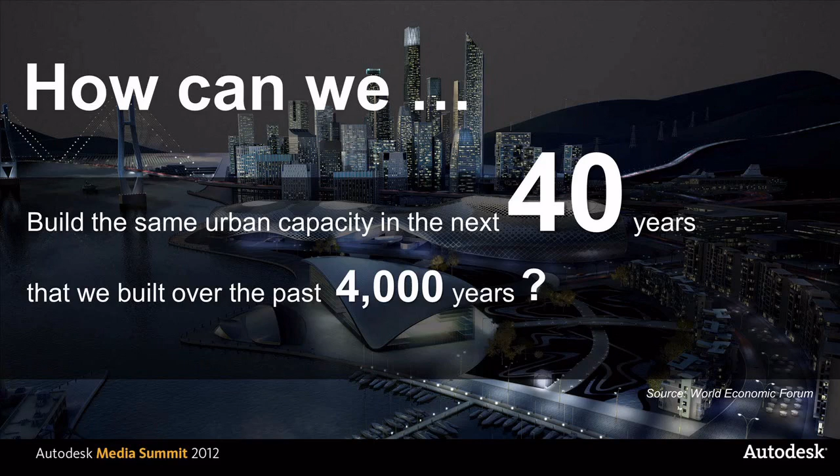Let's start by talking about energy industry challenges. According to the World Economic Forum, the world needs to build as much urban capacity in the next 40 years as has been built out over the past 4,000 years. That urban capacity also represents tremendous growth in energy use and related production, supply, transmission, and distribution, and all in a more sustainable, intelligent way. So the question to explore today is how can we do that, and how can design technology contribute?

Let's take a look at the macro trends driving the energy industry today. First off, there's economic change, represented by more resource demand, more cost volatility, and more environmental issues. Then we have shifting demographics and changes in the workforce and their expectations.

The paradigm is rapidly shifting from a 35-year veteran grabbing a paper network map or plant drawing and heading out to the site in a truck to verify a part or status, to a digital native expecting to access that information in 3D on an iPad or a mobile device.

We also have new assets and new models. For example, plant or network sensors that rely on intelligent connectivity models to deliver value to operations. We also see more multi-firm and multidisciplinary projects requiring model sharing to meet project budgets and timelines. And finally, this all contributes to a data explosion, more intelligent data points, and a proliferation of 3D and imagery data. For that, customers need more data storage, analysis capabilities, and computing power, which echoes the cloud themes that you've heard earlier today.

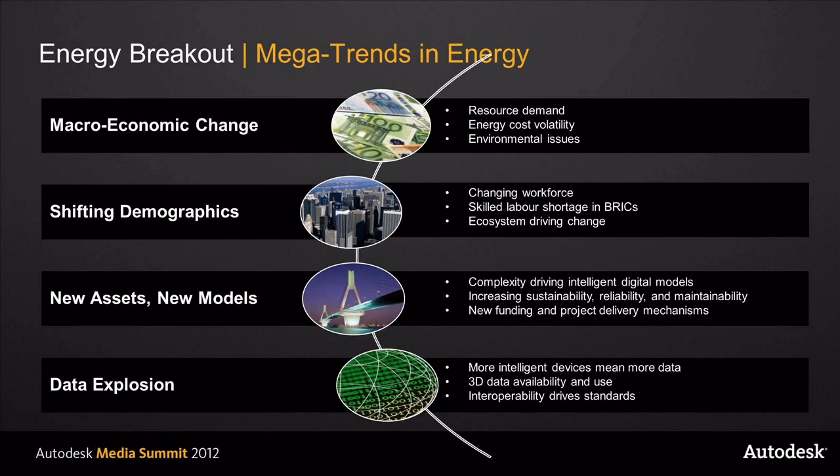Those are trends that cover a very complex set of domains across the industry, from energy supply and production to renewable resource generation to transmission and distribution, and down to end uses like transportation and buildings. Autodesk is unique in having customers and solutions across all of these energy industry domains. Today, we're going to focus on two of these, oil and gas and electric distribution, where combined we have hundreds of thousands of users who are designing tomorrow's energy infrastructure today.

Now I'm going to turn it over to Ben to discuss oil and gas. Thanks, Alan. That was a great introduction and a good overview of the macro trends shaping the energy industry. So Ian and I will be covering the supply side of the energy equation, and we're going to focus on the Plant Design Suite in the context of the oil and gas industry.

So why are we focusing on oil and gas? Well, it represents about 60% of the world's energy supply. And at Autodesk, we believe we can deliver great value to the industry's design and engineering processes.

So first of all, what is oil and gas? To the average end consumer, oil and gas means the gas that runs your car, it's the natural gas that you cook with, and it's the heating oil that warms your home. At Autodesk, we see the entire oil and gas supply chain, and so that includes upstream, midstream, and downstream.

Upstream includes finding the natural resource and getting it out of the ground. Midstream includes the storage and transportation of the natural resource, and downstream includes the refining and processing, as well as bringing the natural resource to market in some consumable form.

So Alan covered some of the large macro trends shaping the industry, and many of these trends are driving real business challenges for our customers. One big challenge is around fast-track projects, which requires multiple project tasks to be done in parallel. Another challenge is around specialized skills and resourcing.

It's difficult to find people who are trained in the technology, and when they are able to find people, they tend to be located in all different parts of the world. So project teams are spread around the globe. And this leads to challenges around maintaining accuracy and efficiency of your projects.

And lastly, businesses often face complex technology that's difficult to install and difficult to maintain, and often yields very low ROIs. So at Autodesk, we're helping many of our oil and gas customers address these challenges.

We're seeing many of our customers use our software throughout the life cycle of their projects, from planning and design to construction and operations of their facilities. They're using our products throughout their multidisciplinary workflows: AutoCAD P&ID for their P&ID work, AutoCAD Plant 3D for their 3D modeling and piping, Revit Structure and AutoCAD Structural Detailing for their structural design, Autodesk Inventor for their equipment design, and finally they're bringing it all together with Navisworks to do their design review and clash detection.

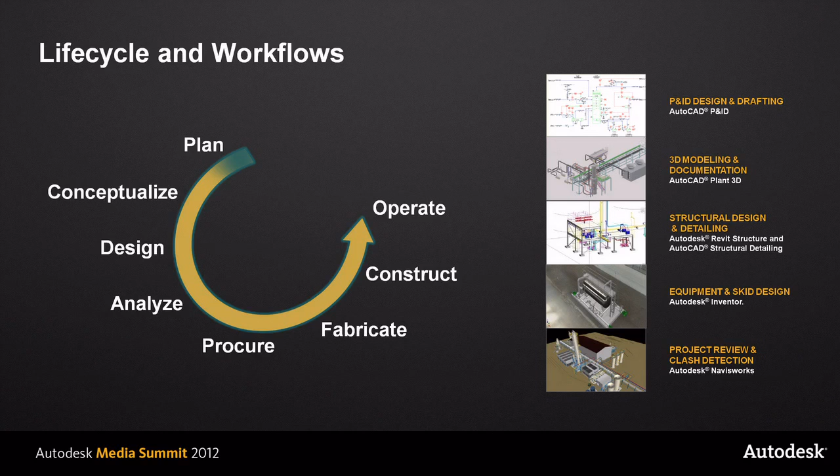With that in mind, we've brought together all these products into a single suite, the Autodesk Plant Design Suite. Today we're announcing the 2013 version of the new Autodesk Plant Design Suite, which comes in 3 editions: Standard, Premium, and Ultimate. It's an intelligent 3D modeling and review solution for plant design from small to large-scale projects such as oil and gas facilities. 2013 offers workflow enhancements that help simplify coordination across project stakeholders. It brings together AutoCAD P&ID, AutoCAD Plant 3D, Inventor, Revit Structure, AutoCAD Structural Detailing, and Navisworks.

And newly available to all Autodesk Suite customers is Autodesk 360. As you probably heard this morning, these are cloud services for computing, storage, and data sharing. At this point, I'm going to hand it over to Ian, and he's going to show you how customers across the oil and gas supply chain are using the suite to help meet the energy supply challenges of today.

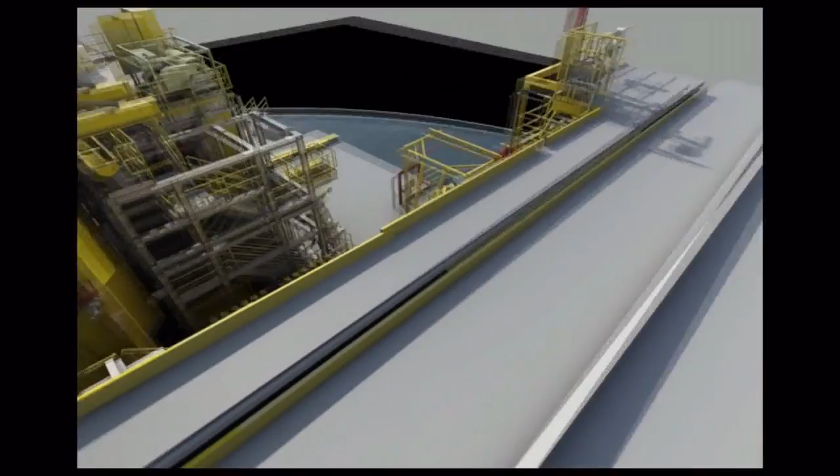Here's a model of the oil drilling rig that RDS just finished working on. Oil drilling rigs are movable and are transported to wherever they're needed, and the owner only sees revenue when the rig is actually drilling. So fast turnaround is imperative on these reactivation projects. As you can see, these rigs are crammed for space.

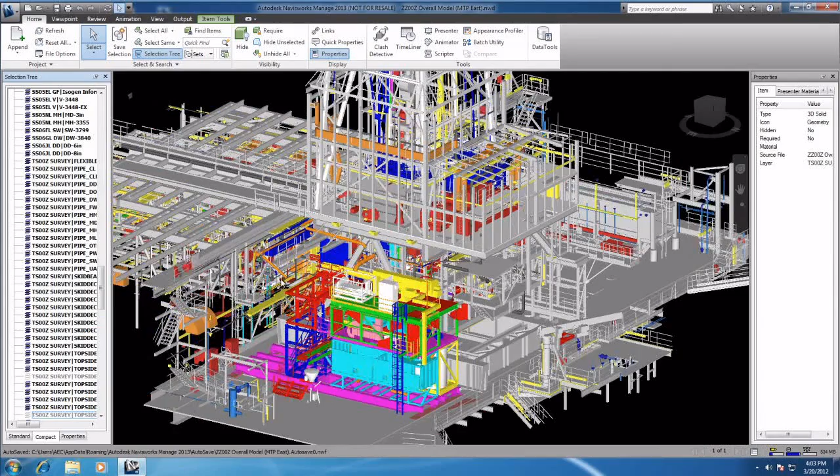Now you can see how complex the rig is as we review the model in Navisworks. The piping and structural complexity is enormous, and space is at a premium. By using the Plant Design Suite, engineers and designers could model the steelwork and the piping, and the project engineers could review progress in 3D.

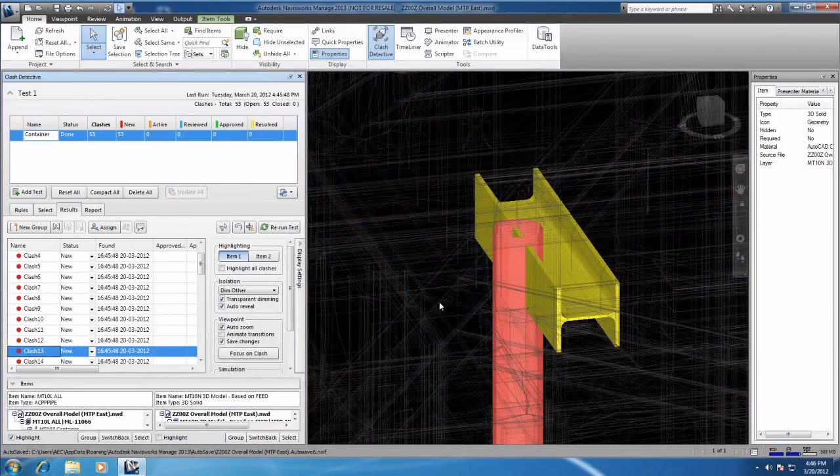One important aspect of the project is clash detection. Piping spools need to be prefabricated and delivered so they fit first time—there's no time for rework. A new feature in Navisworks 2013 is the Clash Detective user interface, which is simpler. In this example, we're checking piping against steel, and here's a clash that needs to be resolved: the piping must avoid the beam. In the Clash Detective, the project engineer assigns this to be resolved. Here's a case which is not a real clash—this is a piping support, so we mark this clash to be ignored.

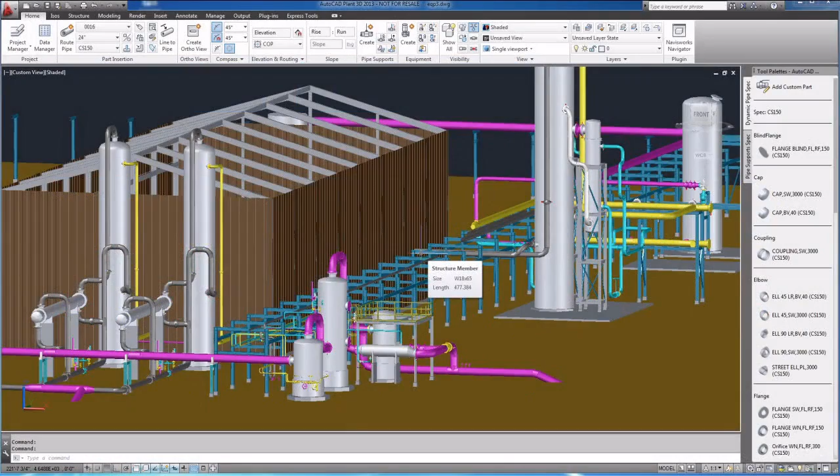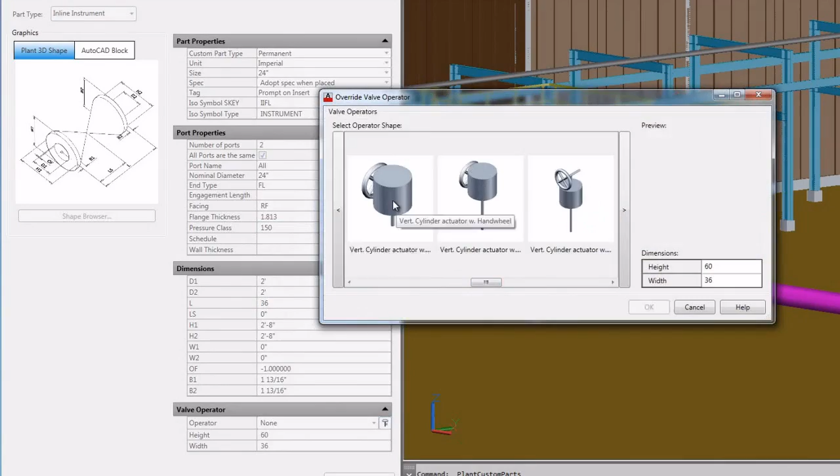In this pumping station example, we'll show you a new feature for AutoCAD Plant 3D 2013: being able to insert custom pipe fittings into a pipe. Normally designers use piping specs to select the correct type of components, but sometimes specialty valves are custom ordered and their dimensions differ from spec valves. Plant 3D 2013 has a new easy-to-use interface which allows the user to input these dimensions, select end fittings, and also the type of operator that will be used for the valve. Then when the valve is placed in the line, the mating flanges are automatically inserted along with the bolts and gaskets needed for the connection. This keeps the materials takeoff current as the model is created.

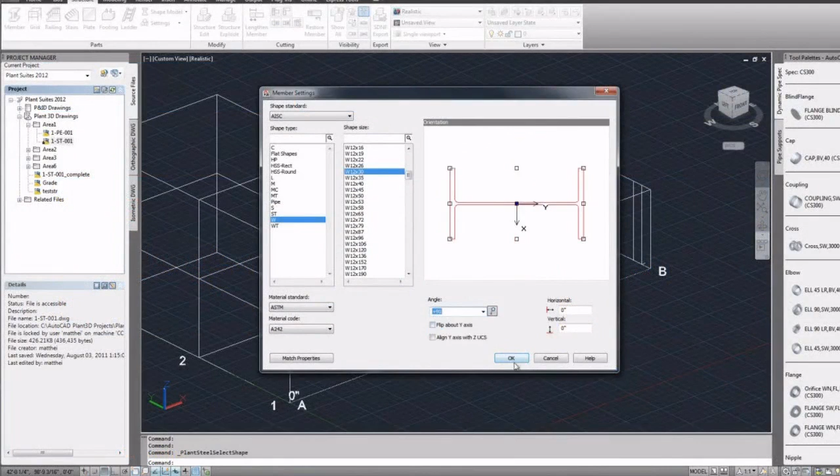Let's take a look at some of the workflows in Plant Design Suite. First, let's take a look at steelwork. AutoCAD Plant 3D fully supports preliminary steel modeling, and here we can see the designer selecting the steel sections he wants and placing the columns on the grid.

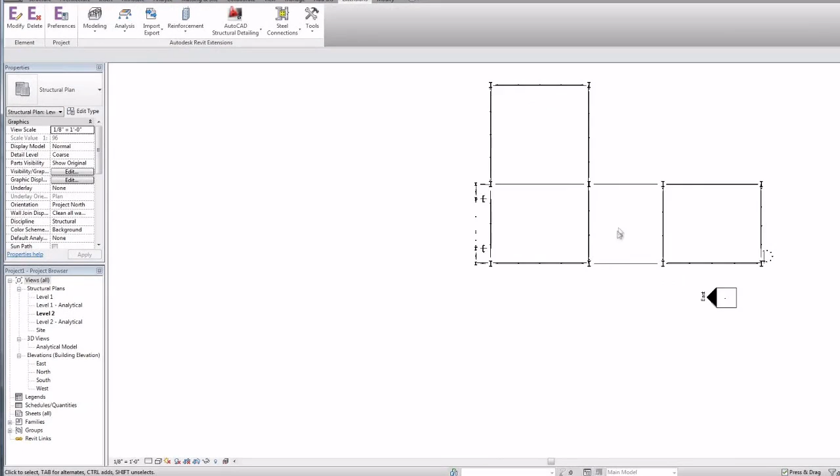Once the preliminary steel layout is done, the steel layout is sent to the structural engineers for the detailed design, in this case Revit Structure. It's used for plant modeling and steel analysis, and the preliminary model is brought directly into Revit. Revit Structure allows structural engineers to work in many different ways, such as standard 3D or an analytical or simpler model.

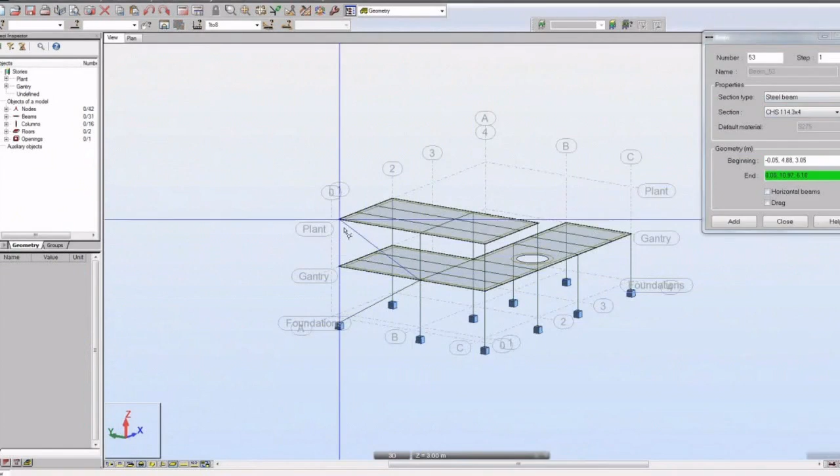Structural analysis is performed using Robot, and as an end result, secondary steel and bracing may be added. Further analysis can be done as necessary. Then going back into Revit Structure in 3D, the bracing can be edited so that it's placed in a more practical arrangement, as we see here.

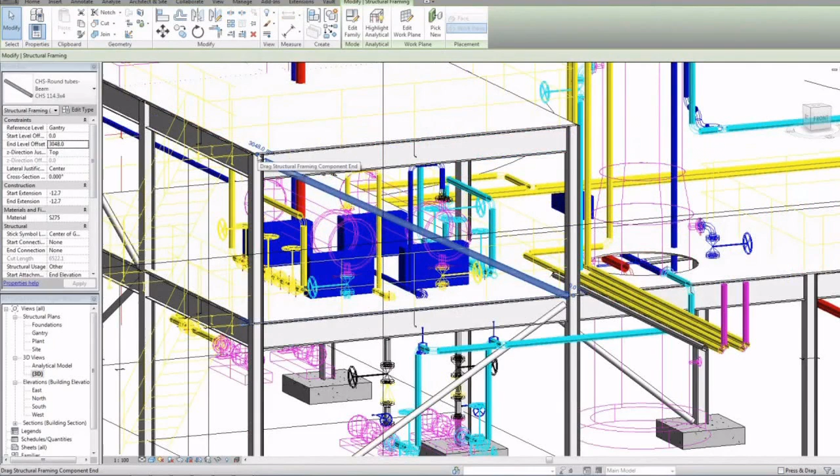Now the structural design is complete and the model is ready for fabrication. For this we use AutoCAD Structural Detailing, also part of the Plant Design Suite, for all of the connections to be designed and documented.

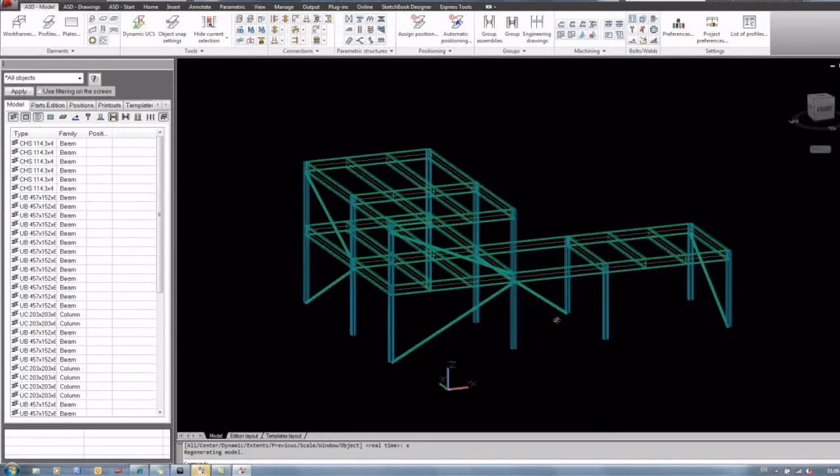Now we are in AutoCAD Structural Detailing. All the beam to column and other connections are designed using simple to use dialog interfaces. Let's look at how a beam to column connection is detailed using these dialogs. The connections, once placed, can be viewed in 3D so that interferences with bolts can be quickly identified and corrected.

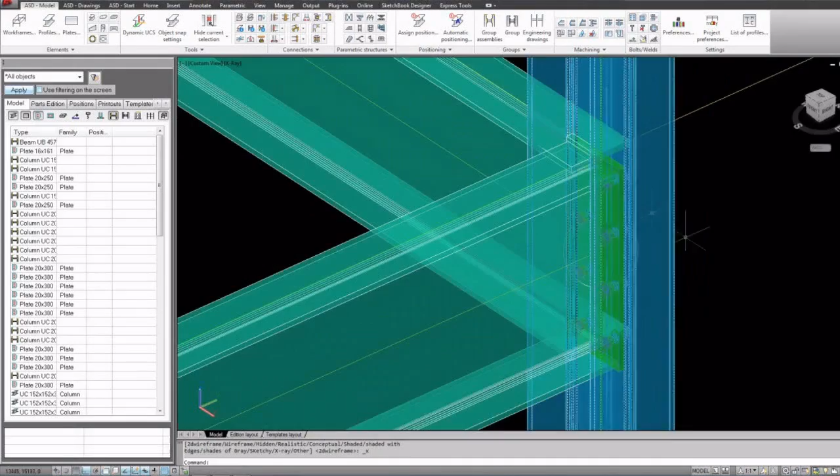Okay, so now let's take a look at piping. The most man-hours are spent in piping design. We first start with placing equipment such as pumps. Plant 3D comes with a comprehensive library of standard parametric equipment items. Here we place a pump and then copy it to place the secondary pump.

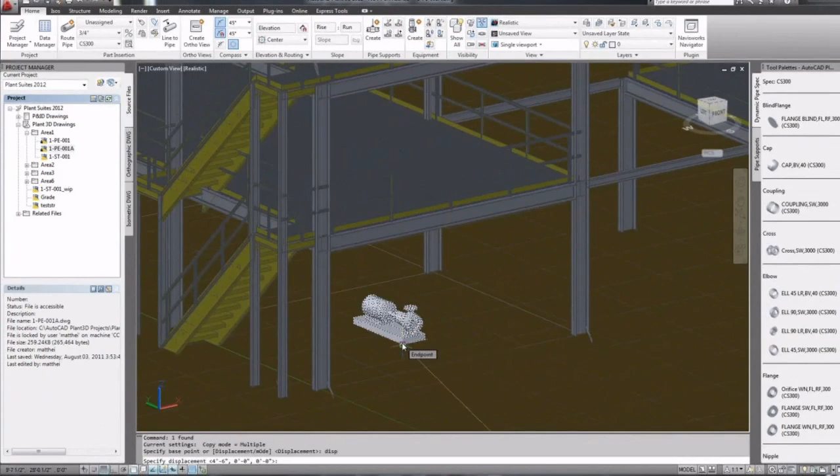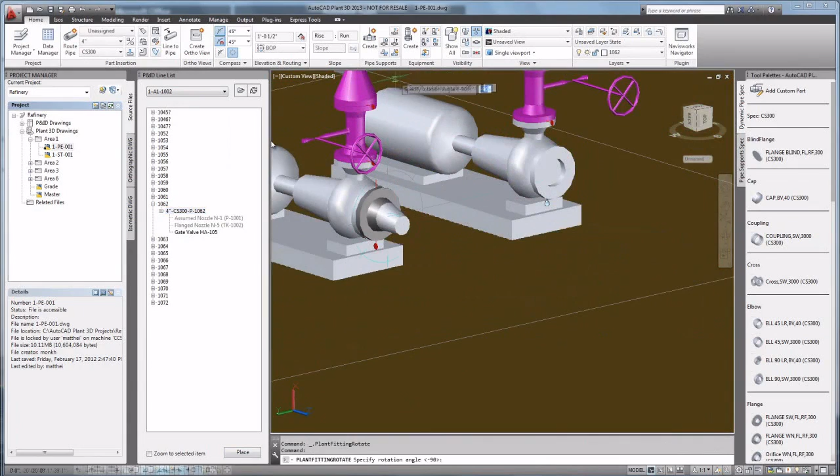So now we're ready to connect up the pipes. Let's take a look at piping on the suction side of the pump. We first extract the line list from the piping and instrumentation diagram, known as P&ID, and by selecting the line we automatically set the pipe parameters such as size, spec and line number. The flange is automatically placed and we can replace the concentric reducer with an eccentric reducer.

And now we can show a new feature in Plant 3D 2013, the ability to place a connection on the flat side of a reducer. Now we'll continue to pipe up the drain by adding a nipple, a drain valve and then a cap.

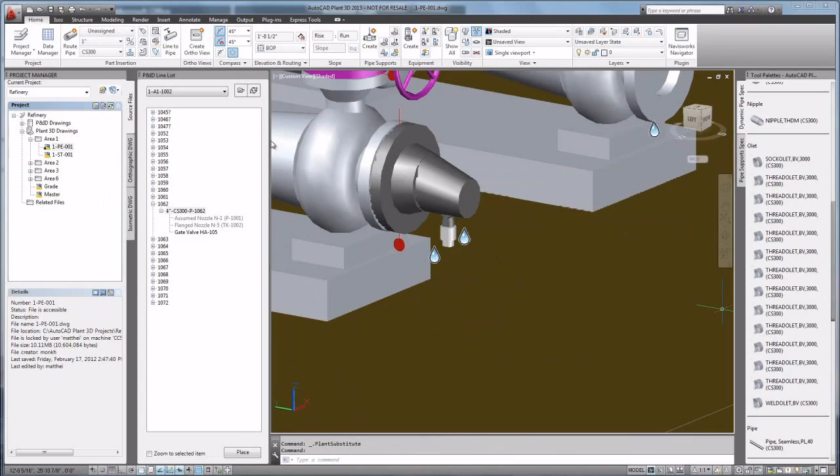And while we're here, another new feature is to be able to replace the valve operators by simply selecting them from a library. In this case we replace the standard hand wheel with a T-crank.

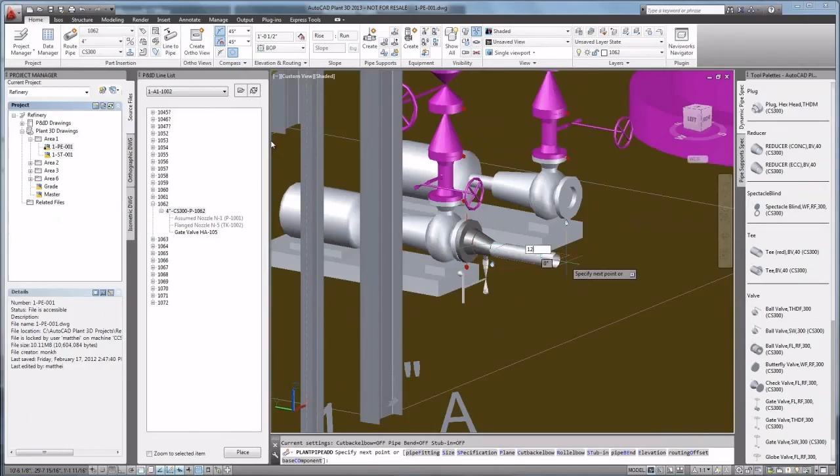So now let's continue piping. Again we use the P&ID list to select the valve, and the piping spec automatically selects a flanged valve and places the mating flanges. Now we continue to route the pipe up to an elevation of 7 feet 6 inches and then again in a horizontal direction.

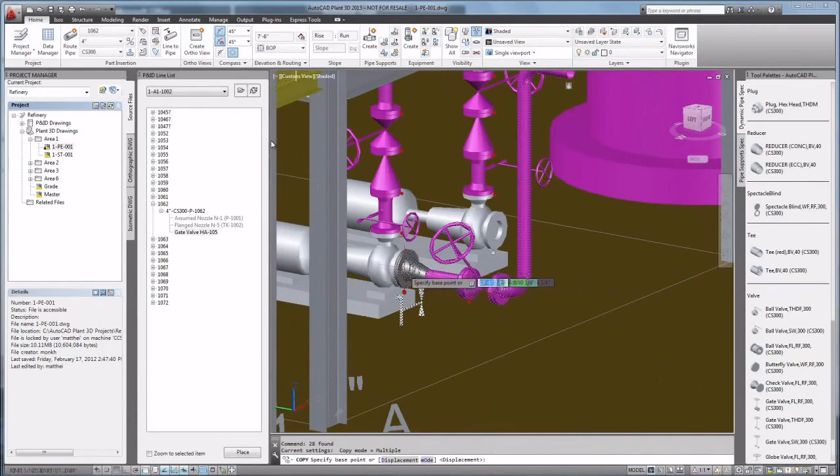So now we take advantage of AutoCAD and simply copy the piping we placed over to the other pump and update the line number from the P&ID line list. Now all that is left is to connect the piping to the nozzle on the column.

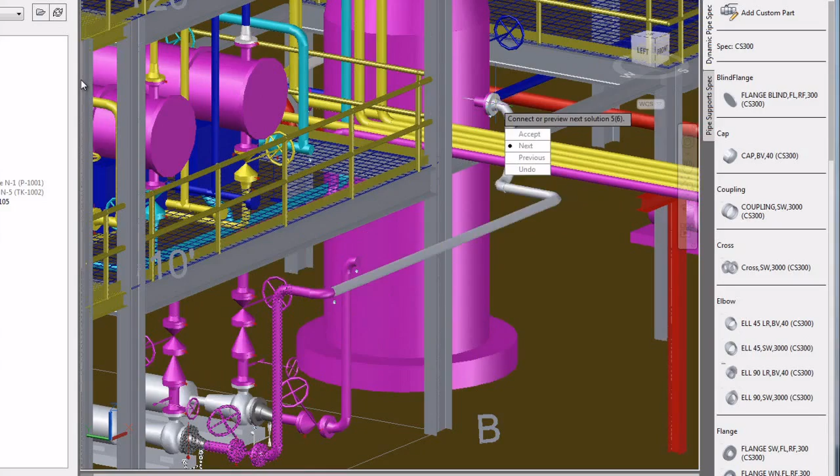Plant 3D will perform automated pipe routing and we simply accept the suggested line route that is our preferred route. Now we connect the other pipe to the one we just routed and the connecting tee is automatically placed.

Finally, let's go ahead and place supports to hold up this piping. The interface has been made better in Plant 3D 2013 and we simply locate the supports. The size is determined automatically from the pipe and we can easily adjust the support length as we see here.

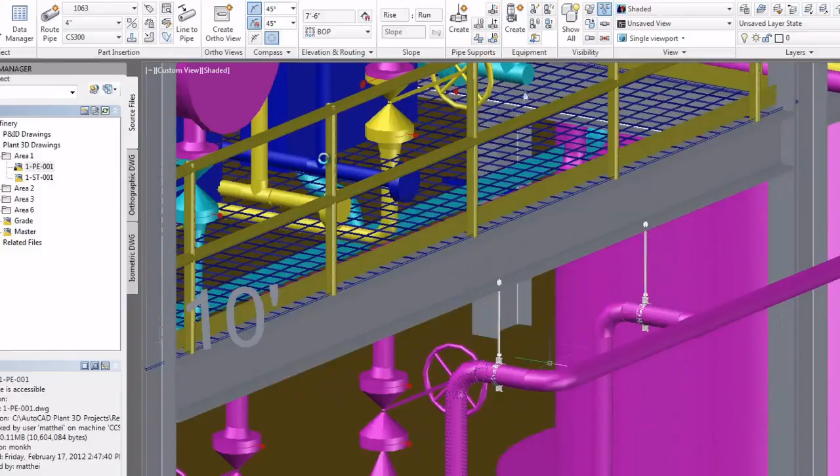Now let's take a look at the equipment workflow. The equipment supplier may use Autodesk Inventor to do the mechanical design of the equipment, and here we will take a look at how we can fully exploit this in the Plant Design Suite to improve the plant design.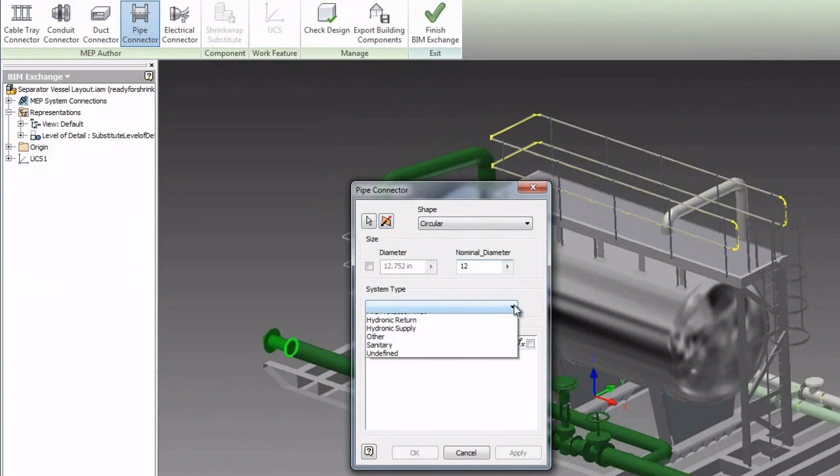This process is contained within the BIM exchange function in Inventor, and the result is an accurate representation of the equipment that takes up much less disk space so that we can place it in the Plant 3D model. Additional properties can be entered.

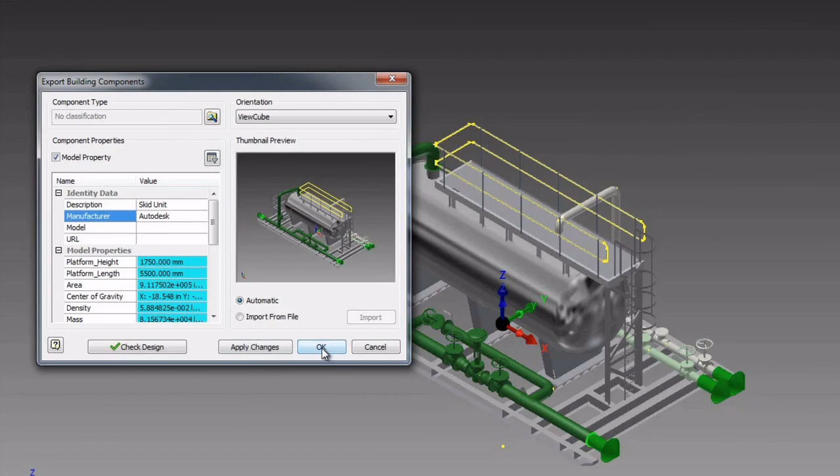And then, when we bring this into Plant 3D, it acts exactly the same way as if the equipment was parametric equipment placed in the Plant 3D model. The final part of this workflow is to place this equipment into the Plant 3D model.

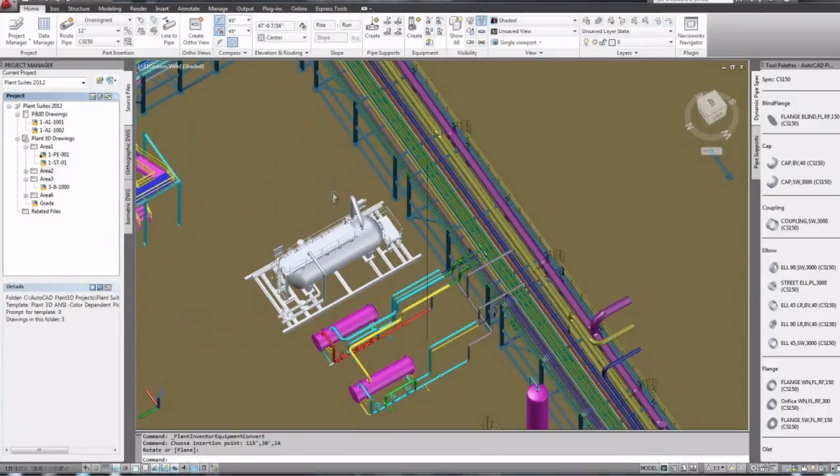We rotate it in the same way as we did a pump. We assign a tag, and we can simply go ahead and make the connection from the pipe rack directly to this Inventor equipment. The bill of materials is automatically updated as we complete this task.

Thanks, Ian. That was great. So what's the summary and what are the key takeaways?

So Ian showed how three customers in the oil and gas industry are using Autodesk software to help meet the challenges of supplying energy to the world. Using the Plant Design Suite, customers are able to use AutoCAD Plant 3D, AutoCAD P&ID, Inventor, Revit Structure, AutoCAD Structural Detailing, and Navisworks together. And they're benefiting from enhanced customer workflows enabled by the Plant Design Suite to deliver projects on time, on budget, and with minimal errors. Thank you.

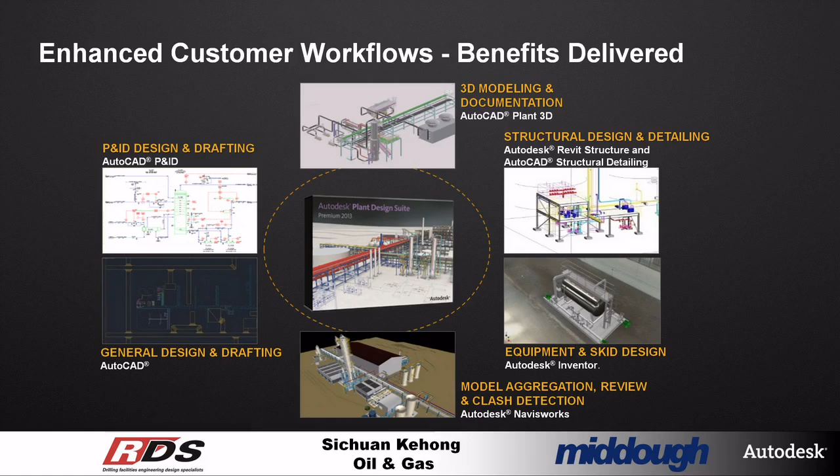Thanks, Ben and Ian. Now we're going to shift gears and talk about electric utility distribution.

There are two key things that we want to share with you today. First, the idea that smart grids start with smart design, and electric utilities are moving towards model-based design and intelligent modeling to manage the complexity of today's smart grids.

Second, we're very excited that our 2013 release of the Infrastructure Design Suite is now available, and this suite now includes two key components of our model-based design offering for utilities: Autodesk Infrastructure Modeler and AutoCAD Utility Design, as well as streamlined workflows across the offerings already in the suite, including AutoCAD Map 3D, AutoCAD Civil 3D, Raster Design, and others.

So why do we say smart grids start with smart design? When we look at what it takes to power up a building like the one we're in today—the lights, the air conditioning, the flat screens—we can sometimes forget about the design decisions made to deliver that power. You start with the building itself, and its orientation, systems, and architecture obviously impact energy use. But then you extend to the utility network, and there are design decisions regarding the size of transformers and conductors, and the connection point to the network itself.

Is it an underground or overhead network? Where are the facilities located, and what's their visual impact on the community? Even things like what's the optimal routing, the cost and environmental factors for the transmission lines, what's the best site for renewable resources, and what are the safety considerations?

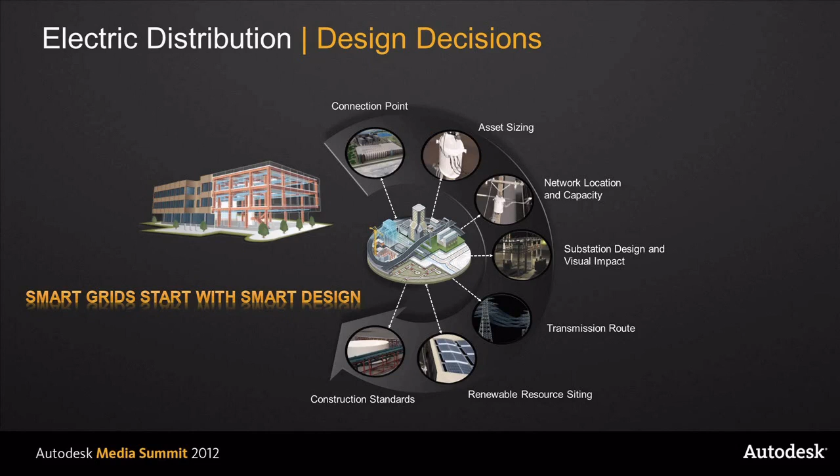So there's a series of design decisions, and these are all raised to an even greater level with smart grid programs. So it's now even more important to understand how all the elements of the network relate and are connected. Intelligent models, shareable across stakeholders, become critical.

Utilities have been evolving to intelligent modeling for a while. This has been an evolution from a drafting environment where the output of the engineering design process has been a CAD file or a paper map that someone takes out to the field.

With our AutoCAD Utility Design product, we've introduced true model-based design for utilities: the ability to lay out and document with productivity tools and utility standards built into the product, the ability to aggregate CAD and GIS data into a single cohesive model, and the ability to estimate project materials, equipment, and costs as you go through the design process.

Now with our utility design solutions in the Infrastructure Design Suite, we're able to offer a complete model-based design solution for electric distribution, covering the full plan, design, construct, and manage lifecycle.

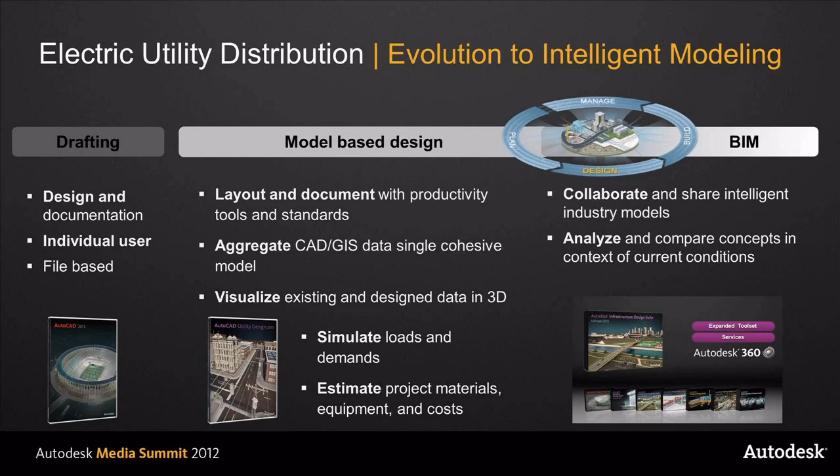So that's the news for today: a full model-based design solution for electric utility distribution that meets today's smart grid requirements, and also introduces streamlined workflows and the framework for our Autodesk 360 solutions to accommodate the data explosion and the need for mobile solutions that utilities need.

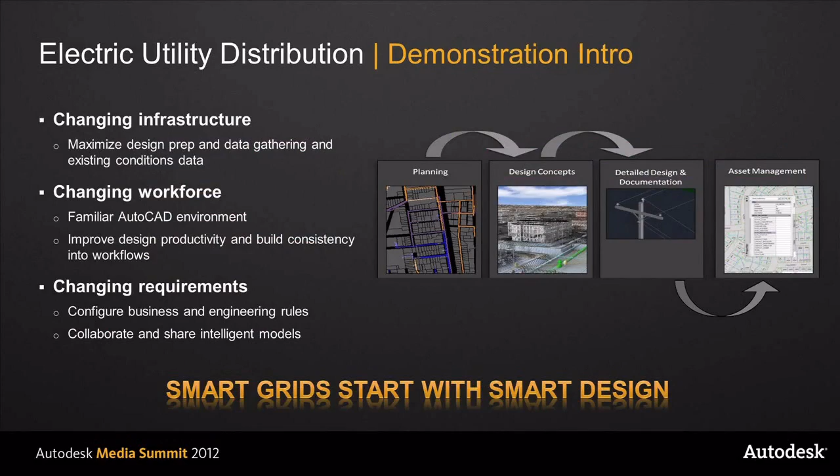Now Lynda is going to demonstrate how the products in the Infrastructure Design Suite address some of the key utility challenges and workflows that we've discussed today. Lynda? Let's have a look at what many utilities have to start with.

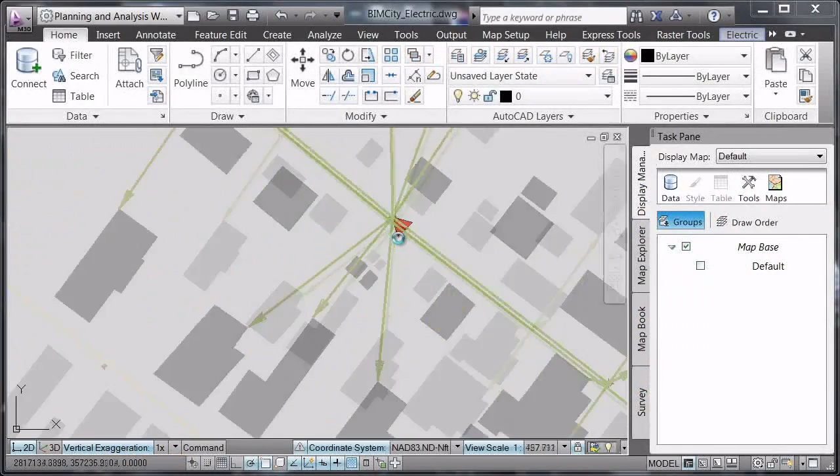It's a plain AutoCAD drawing. Don't get me wrong, it's very pretty and somebody obviously poured a lot of their soul into creating it, but it's still just lines and shapes on an electronic page.

How can utilities take this information that lives on plain AutoCAD layers and start using it to build an intelligent model? Well, as a starting point, they may want to include other data, such as aerial photography, to get a better picture of existing conditions.

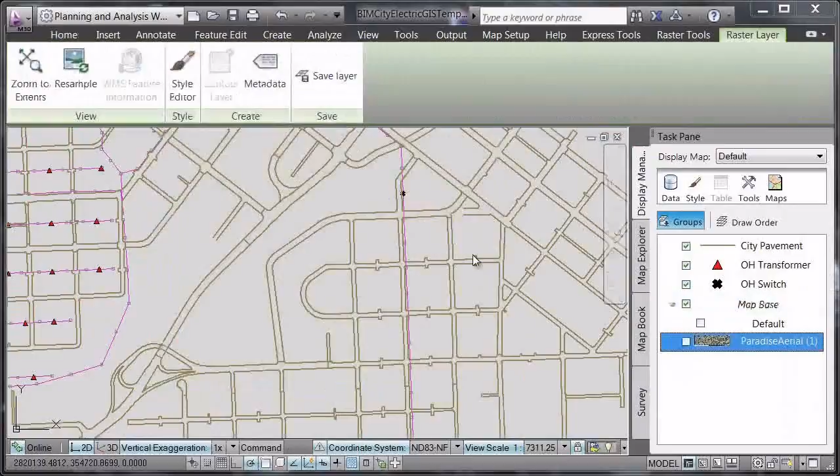Data is often held in disparate formats, but dragging and dropping this into AutoCAD Map 3D enables utility customers to aggregate existing data into a familiar AutoCAD environment.

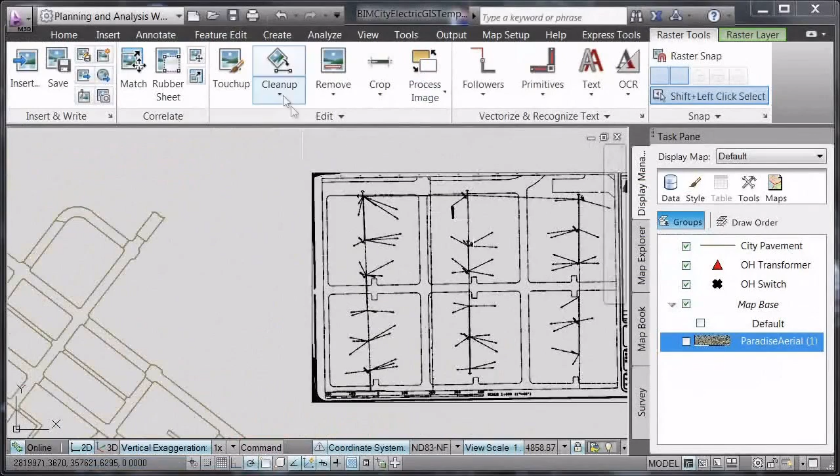Another challenge they may face is incomplete data sets—the only data for a certain area may be a scanned picture of a map. But the Infrastructure Design Suite 2013 contains tools which enable you to bring this data in, even if it isn't georeferenced. There are tools for processing images and cleaning them up, and it's a simple matter of choosing the size of dots you want to eliminate, leaving the raster much clearer.

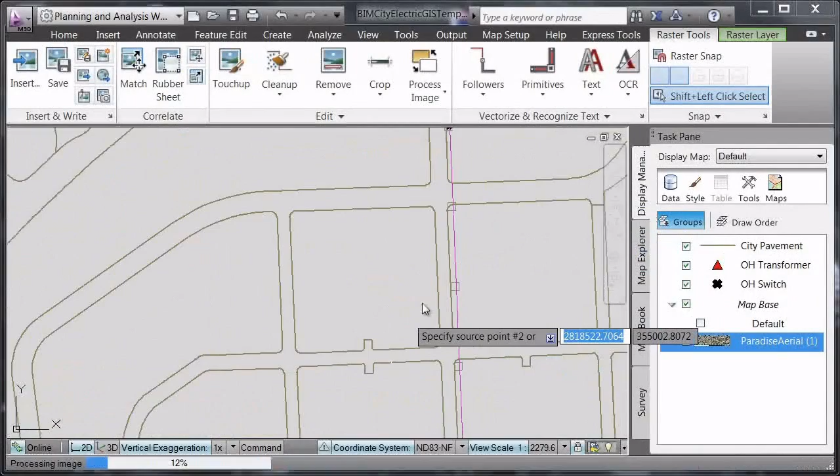Now what you can do is place the image in the correct geographic place by correlating points in the image to points in the existing condition. We'll choose one point over here and a point in the real world, and then do the same at the other side of the image.

Once this is done, the image will be put into the correct geographic position and we're ready to create vector data. Vectorization tools enable utilities to create lines, rectangles and polylines from scanned paper maps in a fraction of the time it would take to redraft them.

Now, these AutoCAD lines are a great start, but more and more utilities want to use their design and as-built data in intelligent models. So you have the ability to classify this data into real-world object classes, complete with default attribute information defined according to your standards.

We saw how tools in the Infrastructure Design Suite have made it possible for utilities such as SwissGrid to complete tasks in hours instead of days, assimilating data from over 20 different utilities into a single source of truth. Now let's have a look at how utilities can improve design productivity and address changing requirements.

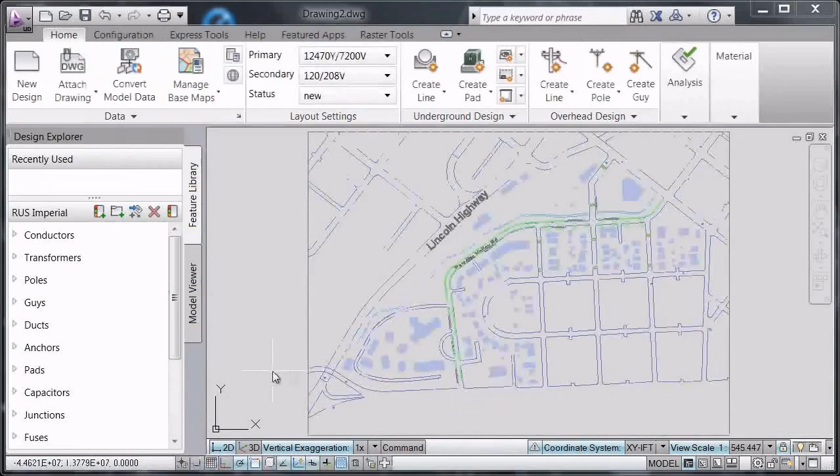Let's imagine we're redeveloping a street, and part of the redevelopment is undergrounding facilities and installation of electric vehicle charging stations. New to the Infrastructure Design Suite 2013 is AutoCAD Utility Design, which can help utilities design faster and smarter. Because it's built on AutoCAD Map 3D, the exact same geographic and CAD data can be used as base maps.

Also, the newly created and classified CAD data we created in the previous step can be converted into an intelligent industry model. This particular utility has switches and transformers held in Esri shapefile format. These can be added to the conversion dialog along with the CAD lines and poles we created from the raster map.

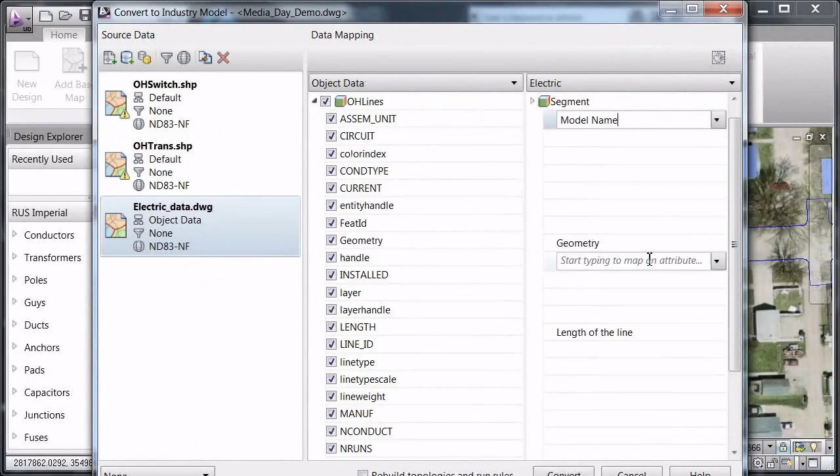Each data layer will be matched to a layer in the model, and attribute data from the source will be mapped to attribute columns in the industry model, such as assembly unit being mapped to model name. The same process can be followed for other data sources, and this data mapping profile can be saved for further use.

Now we can see the newly created data, and if we click on a feature such as this pole over here and take a look at its properties, we see the attribute data as well as the connectivity data, showing the various facilities that are connected to it. We could even click on one of these little knuckles to disconnect facilities from each other.

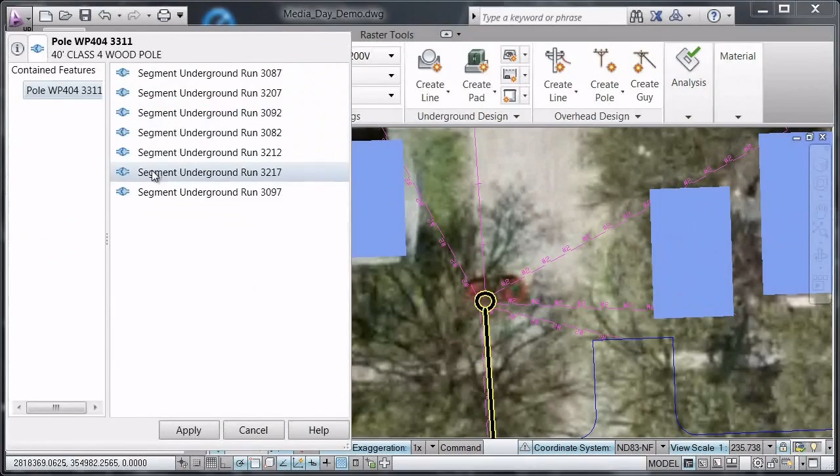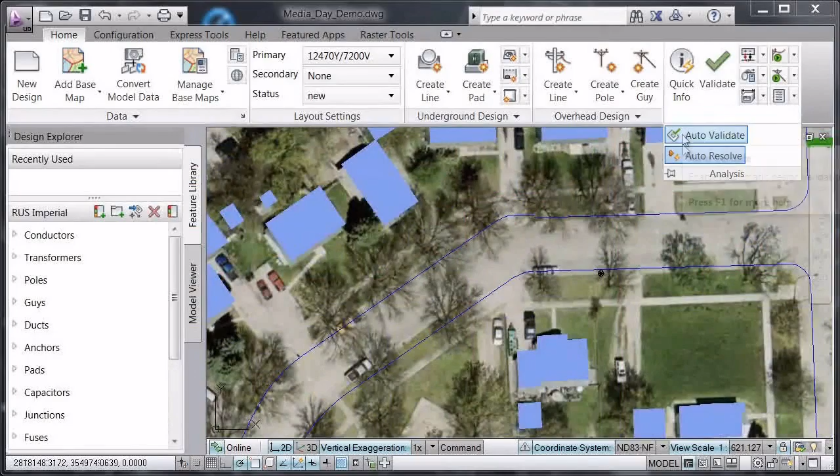But before we start our underground design, I just wanted to point out some of the built-in design rules which make it easier to right-size facilities and streamline the design process. AutoCAD Utility Design has an auto-validation process which flags errors as you go.

So we'll switch to 3D for better perspective, and I'll draw a simple 3-pole overhead line. Now, once this is drawn, we can see there's obviously errors, and if we validate the design, we can see all the design errors that need to be addressed.

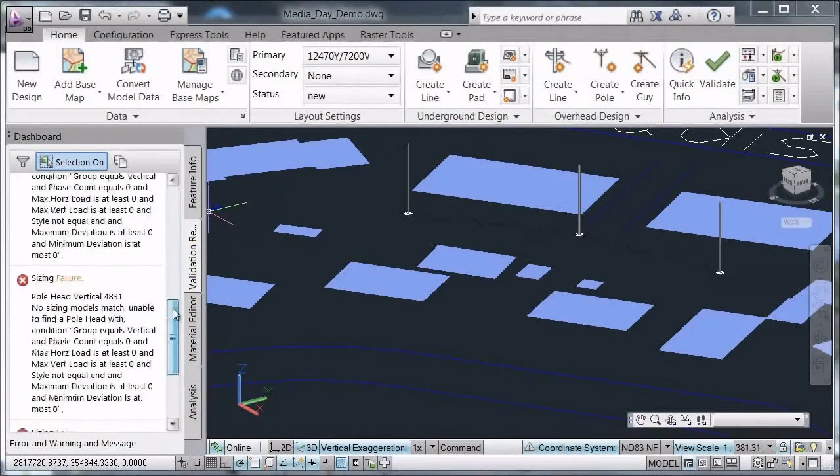By clicking on each error, we're given suggested solutions. Then by clicking on these solutions, the error is resolved. As we click through all the errors, you can see the design on the right gradually taking shape, with wires being attached to poles, pole heights being updated, and guys and anchors being added until all the errors in this particular part of the design are resolved.

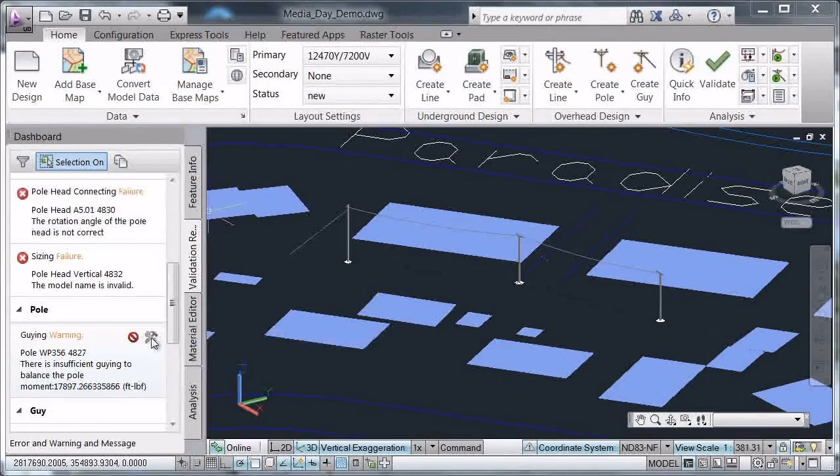However, new to the 2013 release is the ability to automatically resolve design errors according to rules you configure in the model, meaning that the same type of 3-click, 3-pole overhead line that I drew before will give you the exact same design results, except that the error resolution was done for you and no errors show up on the validation results dashboard on the left-hand side over here.

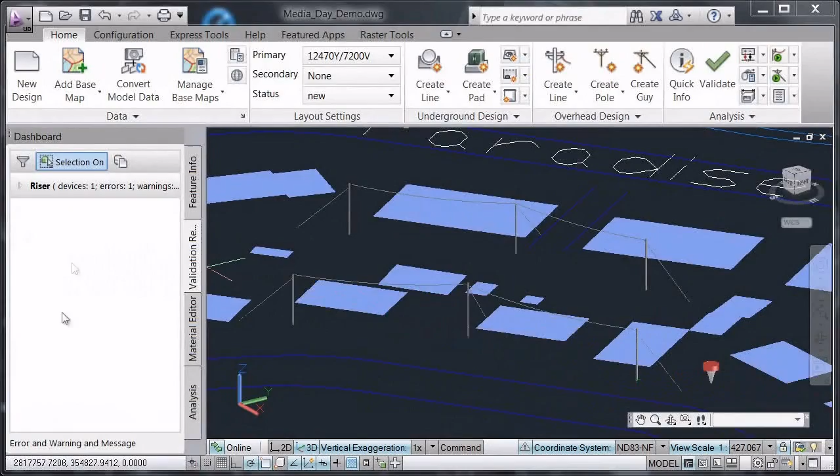So let's go back to our new street development and look at configuring a model to accommodate changing standards that modern utilities need to deal with.

The industry models are configurable, and in this example we want to extend the service point category to include a curbside electric vehicle charging station.

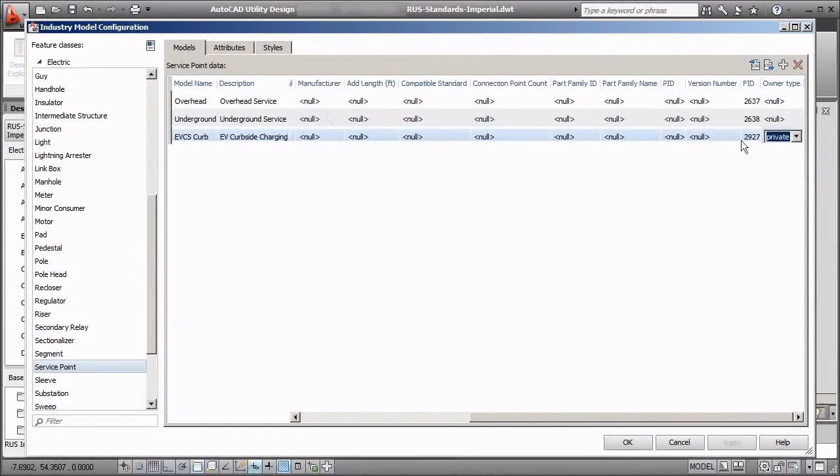It's a pretty simple matter of adding a new row and giving the service point a name, default description, default settings. We'll give it a nominal voltage, structure type, and because these types of facilities may be built by the utility but owned by another company, we'll set the ownership type to private.

You're also able to assign a style for the new facility so that when the facility is drawn, it will automatically use the EVCS file. Once configuration is complete, design work can start.

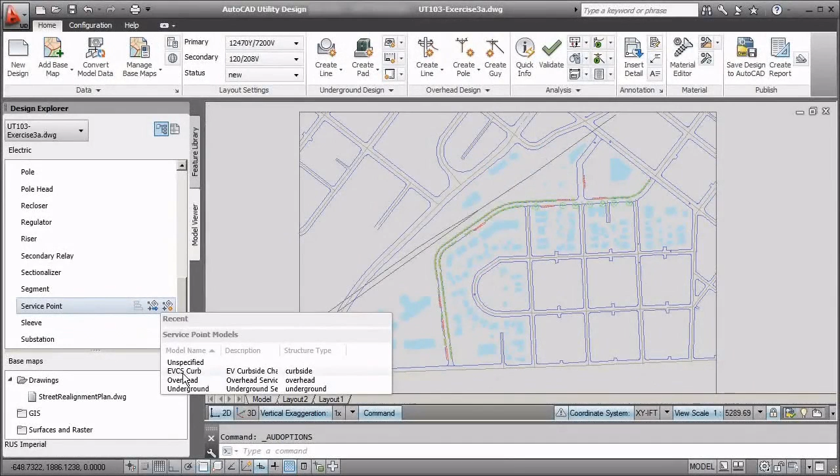We can start by digitizing a service point and selecting the new EVCS facility from the list. Zoom in and click to place a facility in exactly the same way you digitize an AutoCAD point. But if we zoom into one of these and click on one of our little features and check the properties, we can see that the facility we've just drawn has all the default properties we stipulated in the model configuration.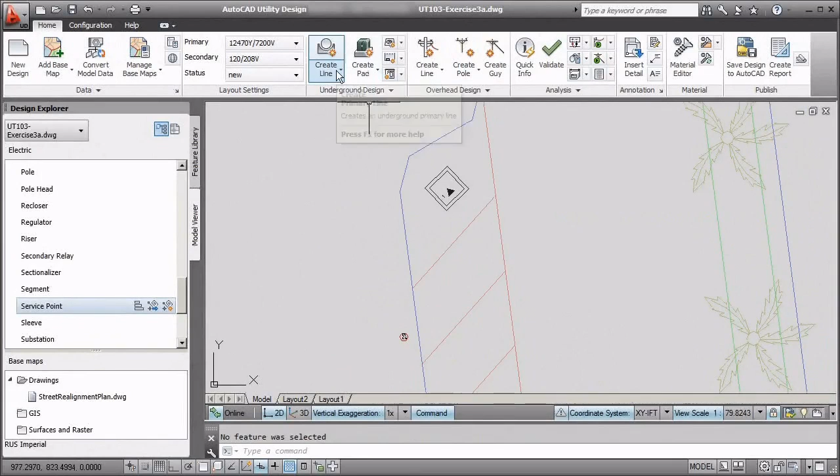Now we can continue with the underground design, creating vaults containing a transformer and using AutoCAD Utility Design's intelligent model topology to make sure that we have proper connectivity between facilities. So by drawing in a secondary line with a duct, we can actually snap to the transformer itself, making sure that we're not just drawing lines and points on a page, we're drawing an intelligent, topologically correct model.

You've seen how utilities such as Anchorage Municipal Light and Power and Swissgrid have been able to use the power of configurable data models to accommodate changing standards and built-in design rules to help spot errors and address them intelligently. But what happens next? Facilities don't just go away once they're designed and energized. They need to be managed and maintained.

AUD is built on AutoCAD Map3D 2013. This means we can open the same type of industry model drawings in Map and use the intelligent industry data to analyze and maintain the network. There are tools for exploring connectivity, for example. By clicking on a transformer, it will tell me that there is one backwards connection from the primary line and 3 forward connections to houses.

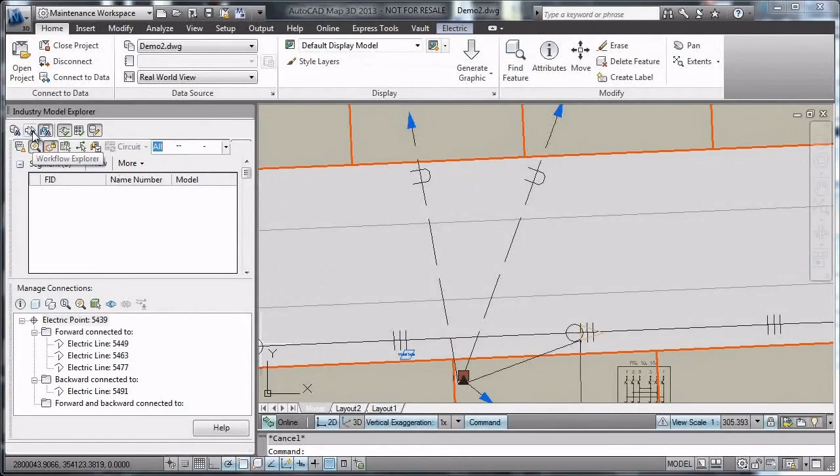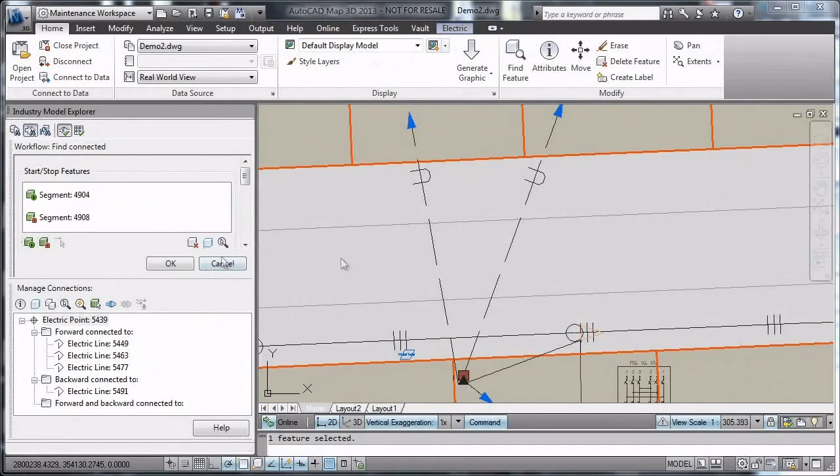There are tools for analyzing the entire network or components of it, and the Workflow Explorer contains a number of regularly used tasks, such as what's feeding a device or running a network trace. If we decide to run a network trace, we can just click on one of the tasks in the Workflow Explorer and click Execute. So by choosing Start and End points for the trace, AutoCAD Map3D automatically tells us which network components are connected to the 2 segments. By integrating design data into the corporate GIS, utilities can help eliminate data entry backlogs and help minimize costs as well.

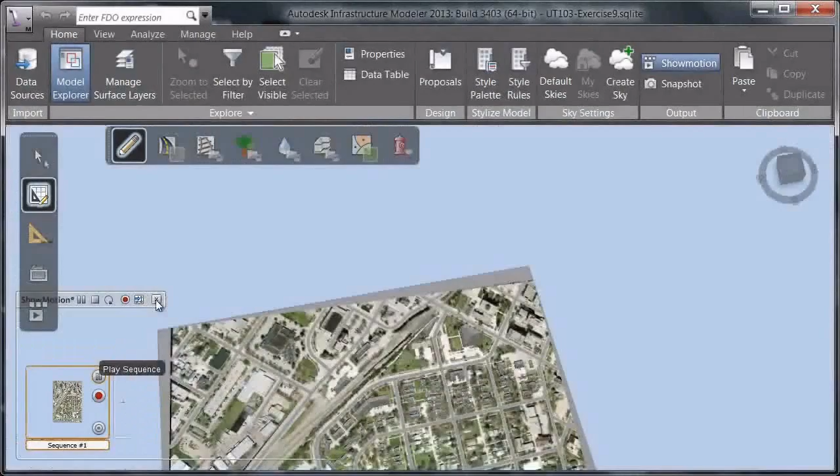And here's another reason to love the intelligent model. As well as being able to use data in AutoCAD Map3D and AutoCAD Utility Design, the exact same data that we're using can be used to build an infrastructure model.

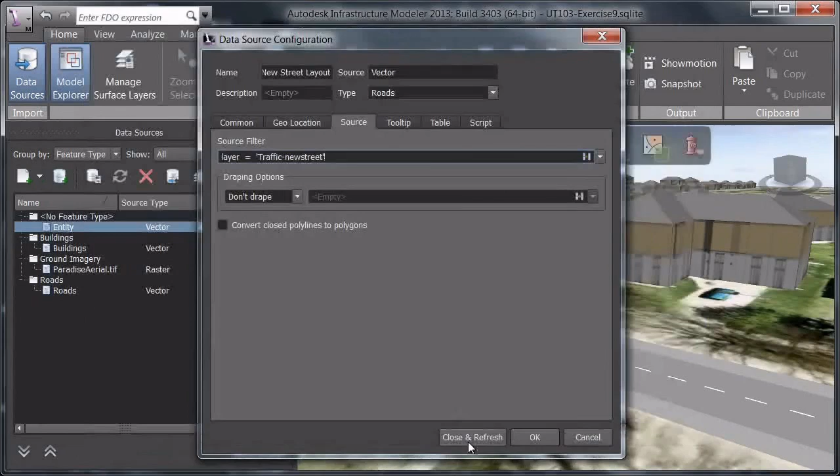For example, utilities could connect to the AutoCAD drawing which contains their street redevelopment and filter the layers within it to select only the layer with the new street layouts. So immediately stakeholders can get a better visual understanding of what the development may entail.

And since utilities are often targets for NIMBYism, the not-in-my-backyard syndrome, they can also create a catalogue of their facilities so people can see what they look like. It's a simple matter of creating a new catalogue item and pointing to the 3D model of the facility. Then it's ready for use.

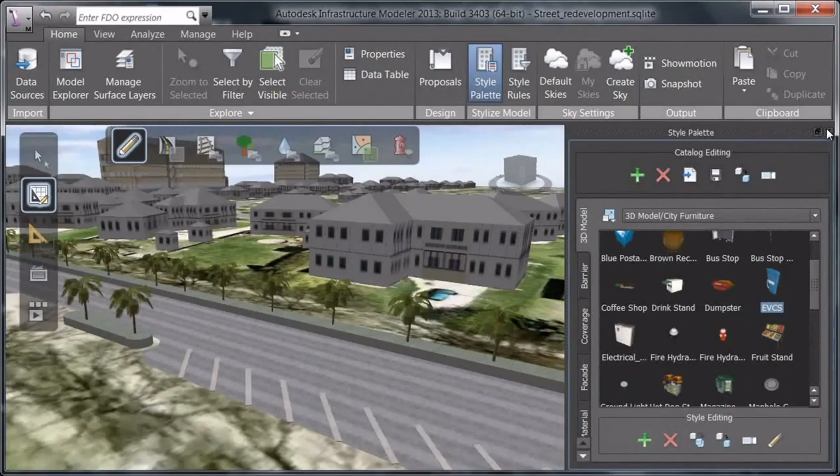Again, our utility can just connect to the DWG of the street development, except this time we'll filter out everything but the electric vehicle charging stations and bring them into the model. Then, once they're brought in, they're ready to be styled with our custom model of the EVCS.

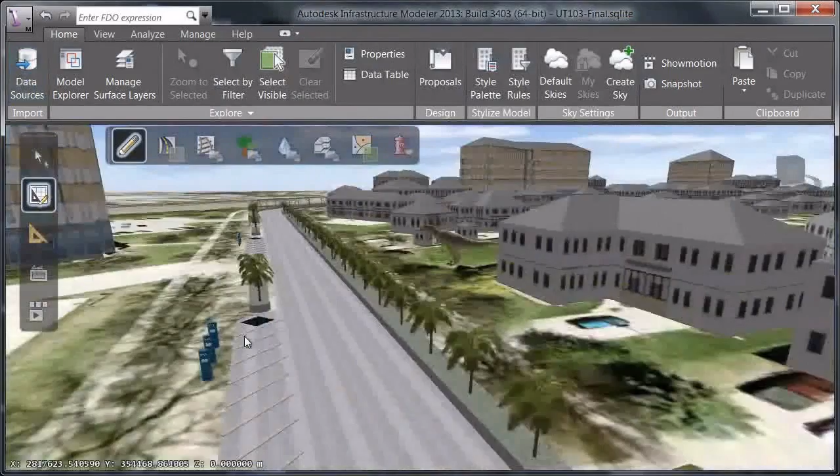This is really powerful because a utility can use a single DWG containing design information or as-built data from the GIS to create an infrastructure model. Now utilities have the ability to give stakeholders an intuitive view of what the project will look like in the existing environment, and even be able to show what underground facilities will be installed as well.

We've seen how the Infrastructure Design Suite 2013 can help electric utilities better manage their networks once they've been designed and built, and also how they can use the exact same data they own and manage to create a 3D infrastructure model which can help them better communicate design and project intent to stakeholders.

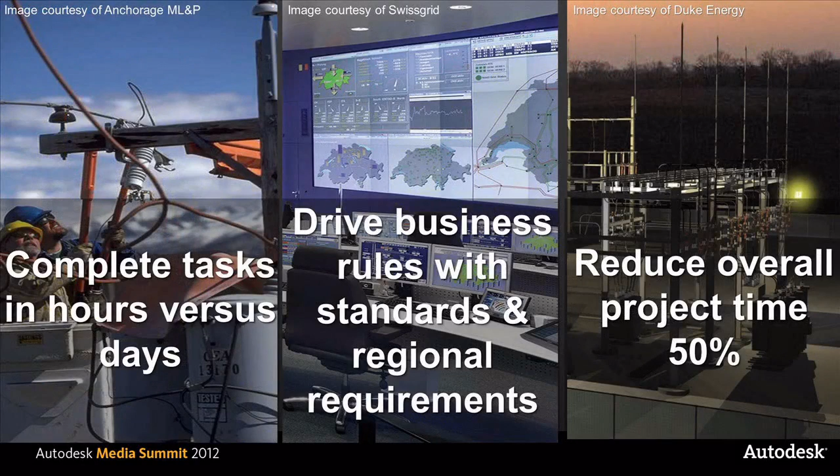Thanks, Lynda. That's an excellent demonstration of some of the capabilities and utility workflows that are available in the Infrastructure Design Suite. So Lynda mentioned several examples of the value of model-based design for utilities, and I wanted to recap a couple of those here.

First of all, utilities like Anchorage Municipal Light and Power use our AutoCAD Utility Design product to really be able to drive more efficiency in their design process and at the same time apply their standards, their utility design standards, in that process. So they can complete design tasks in hours versus days.

Secondly, utilities like Swissgrid are able to apply utility standards and regional requirements to drive consistency and compliance in their business, using our Map 3D and the industry models in that product to really drive consistency and compliance.

Finally, utilities like Duke Energy are using model-based design, in the case of Duke Energy, for their substation design, to reduce the overall project time by leveraging the design information to improve both the design efficiency and stakeholder buy-in throughout the process. So those are just some quick examples of the value that utilities are driving by moving to model-based design.

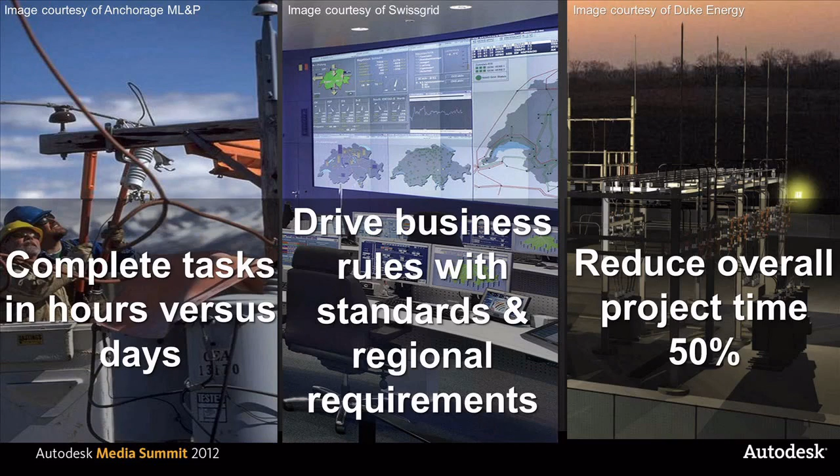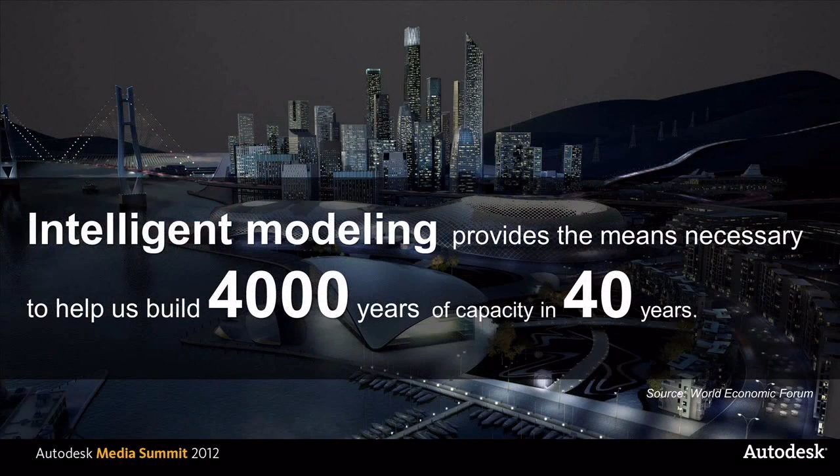And using the products that are in the Infrastructure Design Suite, getting back to our original slide here, we see that intelligent modeling and model-based design are really two of the key capabilities that are going to enable us to build out the energy capacity we need over the next 40 years to serve the growing requirements.